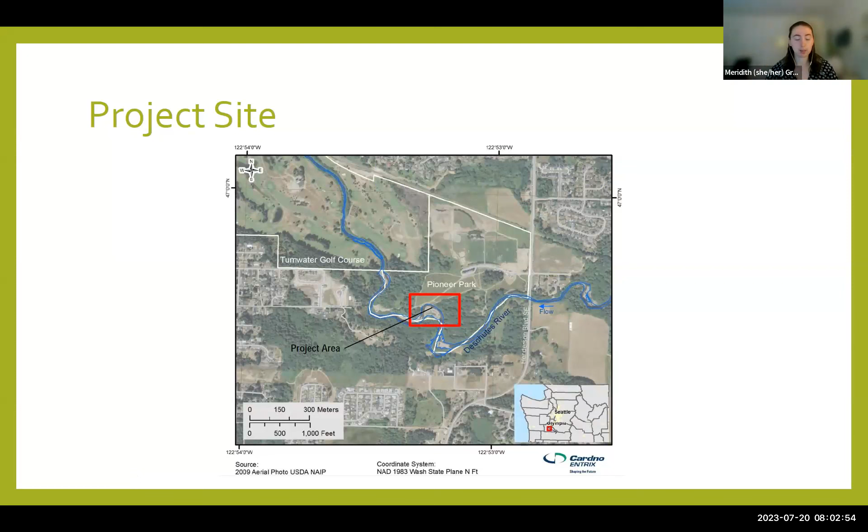A little bit of place setting: Pioneer Park. We're talking specifically about this one area on the southwestern side of Pioneer Park where it meets the river. This project site is really active. We have the Deschutes River running right by it, and it moves probably about 10 feet per year down there, which is awesome—it's what a river does naturally.

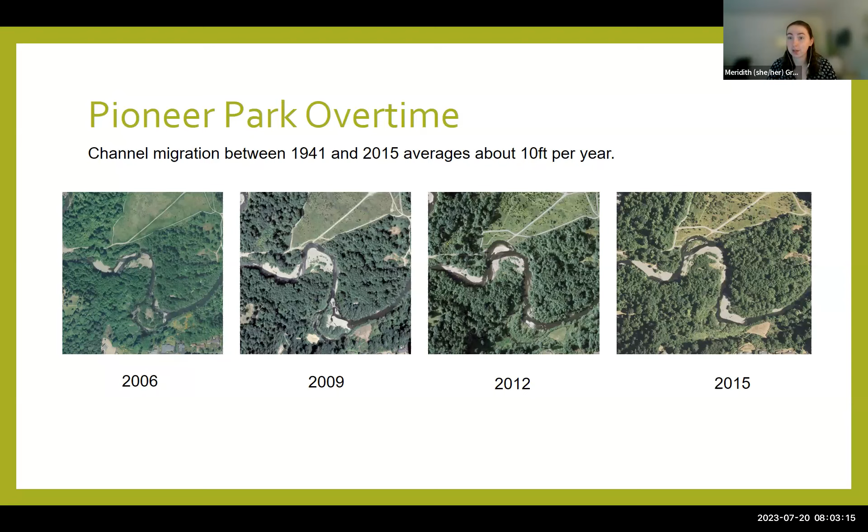However, when we're working in an area such as this, where we have a park to consider and a number of other impairments such as water quality, it can create a problem. We've seen a ton of movement even in the last 8 years since this project really started, trying to figure out solutions to help slow bank erosion and replant the riparian area. As you can see, there are trees on either side of this area where we have erosion, but the center area, which is being eaten away, doesn't have that cover.

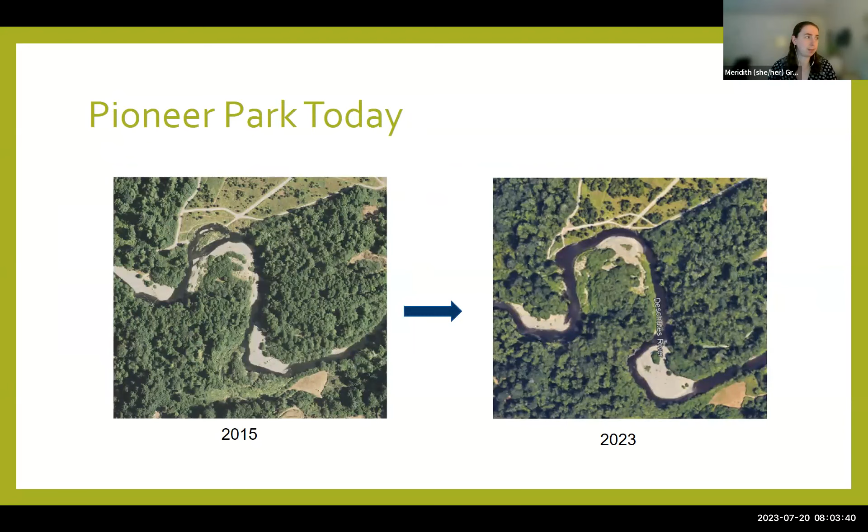So what options are there? Ultimately, the Deschutes River and Pioneer Park specifically is really at risk for high water temperatures and a lot of fine sediment—the Pioneer Park site is one of the top 10 sediment producers along the Deschutes River. In addition, there's insufficient wood. Normally a river would have a riparian area with a lot of trees; those trees would end up falling in and create great habitat for fish and other things. There are also often impaired riparian conditions tied to that lack of wood.

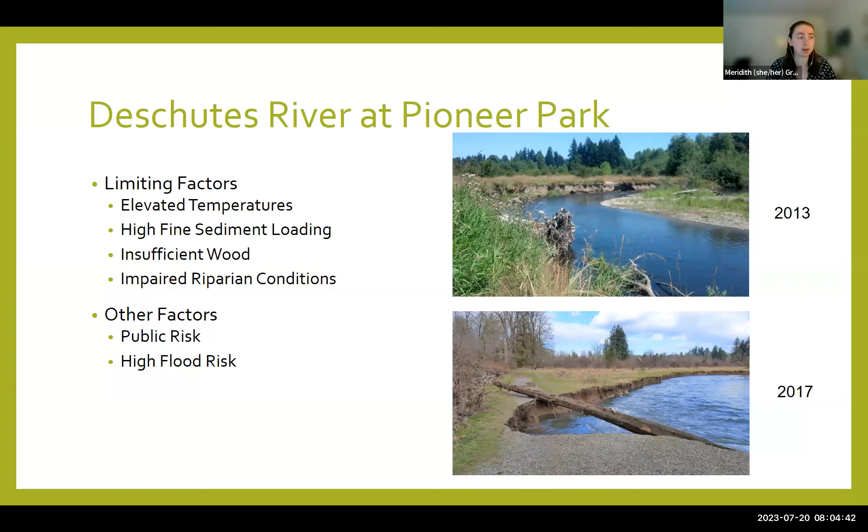When thinking about Pioneer Park in particular, we also have to remember that this park is heavily used by Tumwater residents and everyone around Thurston County, so we need to make sure we're taking public risk into consideration. As you can see in the bottom photo, the river doesn't really care about where trails are, so creating a safe option for folks down there is really important. In addition, the park floods pretty often, so what can we do to make sure solutions down here keep that in mind?

With all that in mind, we went to the Department of Ecology and asked for grant funding to do design, permitting, and construction work to figure out an alternative down there. Tumwater was awarded about $450,000, which was awesome news, and we were able to hire Stantec to complete the design and permitting. Ultimately, the project had 3 years within the grant funding time to finish the designs, permitting, and construction.

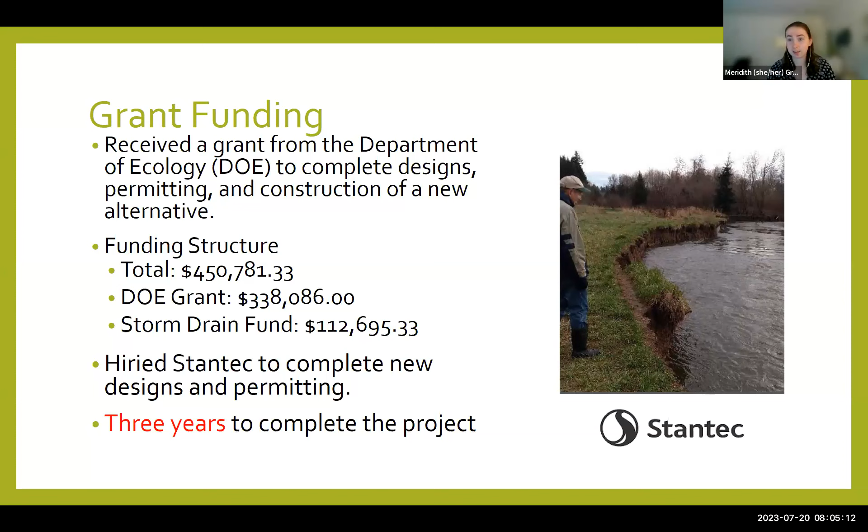We thought that was all great, that was going to work out nicely. Originally, we had planned for this schedule where our grant agreement would run from October 2021 until October of 2024.

We'd be able to do designs and all of that. In projects like this that are pretty complicated and working with an active water body like the Deschutes River, we always try to get feedback from permitting agencies first to make sure timelines are realistic. We bring stakeholders to the table as soon as possible. So last fall, myself and Grant Gilmore from the City of Tumwater met with representatives from the Department of Ecology and the U.S. Army Corps of Engineers to talk about the project.

And they threw a giant wrench in our whole plan. The U.S. Army Corps of Engineers let us know that any project doing in-water work, if we were putting anything in the Deschutes River, would require at least a 2-year permitting timeline review, which throws off our 3-year plan to get everything done.

So we thought, let's take a creative approach to this. Originally, if we focused on bank stabilization and riparian restoration, building about 5 feet back from where the bank is, we'd be able to put large woody debris structures in place without touching the water, knowing that the next winter when the rains got heavy and the river got big, it would erode back and meet the project where it was. This approach allowed us to avoid permitting through the Army Corps of Engineers and stay within that 3-year time limit.

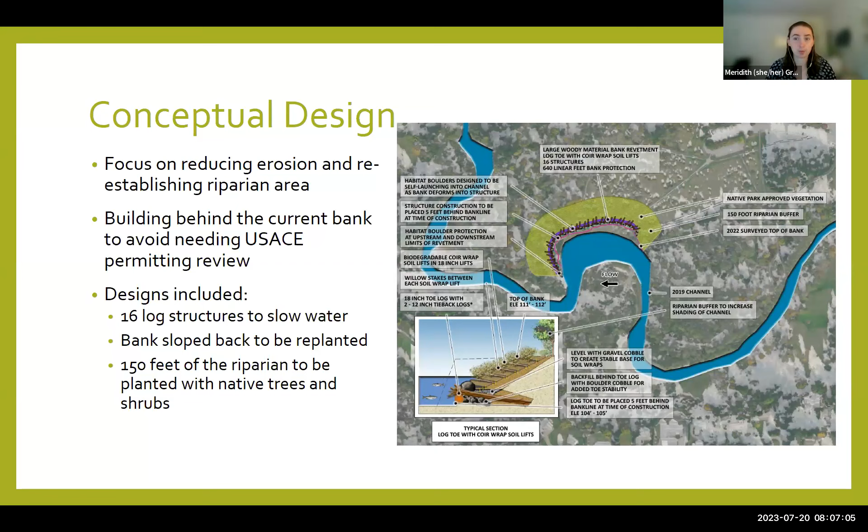Like I mentioned earlier, we really like to talk to stakeholders before we get too far along in the process. So we brought this to the stakeholder group for this project, including representatives from WRIA 13, the Squaxin Island Tribe, Thurston Conservation District, Washington Department of Fish and Wildlife, the Department of Ecology, Puget Sound Partnership, Olympia, and City of Tumwater's Parks Department, and Stantec, the project consultant. We brought this to them in January and February of this year, and ultimately we were returned with a not-approved consensus.

The group felt there wasn't enough in this approach to help restore normal river functions. Because we weren't doing any in-water work, we were relying more on bank stabilization efforts that didn't necessarily have as many co-benefits for things like salmon habitat. So we had to go back to the drawing board.

We knew what our goal was. We were trying to find a solution to meet the water quality and habitat goals that the City of Tumwater and the project stakeholders have, all while fitting within the Department of Ecology's requirements for the funding and timelines. So after a lot of negotiations between many different parties, we were able to come up with a new plan.

The new plan focuses on multi-benefit design solutions that increase river complexity, follow natural solutions that rivers normally have in areas like this, include habitat, and work with the river. The design on the right is an example of what this looks like. This came out of Skagit County and a park they had there.

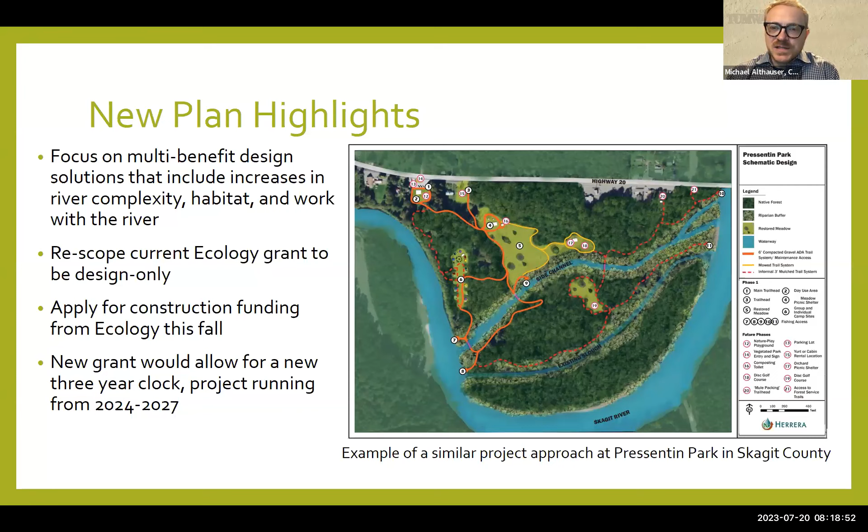Okay, that's helpful. What I wasn't really able to discern was whether we're compromising to meet the timeline and bureaucratic requirements for the Corps, or if we're actually expanding the scope of the project to be a better thing. It sort of sounds like the latter, because it's going to involve everything you just laid out, whether it's additional shoreline or that side channel we'll construct. So, to Eileen's point, every year we waste is a challenge, but it sort of seems like a happy matter of happenstance where we'll be able to save some funds and end up with a better project. Yes, yeah, I would agree.

I think overall it is a better approach to the project site. It took some heartache to get here and a lot of negotiations, but I think ultimately we are going to get a better product out of it. And at the end of the day, we're going the direction that we were ultimately trying to go with the original designs that we had with RCO, Recreation Conservation Office.

So yes, the in-water work, the expansion of this project, the delay - I'm not excited about that, because I've been seeing this project every year and I'm seeing the shoreline and the sediment happen. But at the end of the day, we're going the direction we need to go.

One final question. I think the legislature this year put in a ton of money for riparian and salmon restoration. If we do this timeline, are we still going to be able to potentially access those new funds? I think they put in like $50 million between RCO and the State Conservation Commission to develop programs to achieve things that seem pretty similar to this.

I know Meridith's following that and is working on applications through other projects. So we are looking at ways that we can take advantage of some of those funds and apply some of the projects that we have to that.

When this project first went through the Department of Ecology's Water Quality Combined Funding Program, I think we applied back in 2020. The project ranked 17th out of 120 projects across the state. I anticipate with a better approach, with actually having some conceptual designs coming forward, that we would rank really high as well.

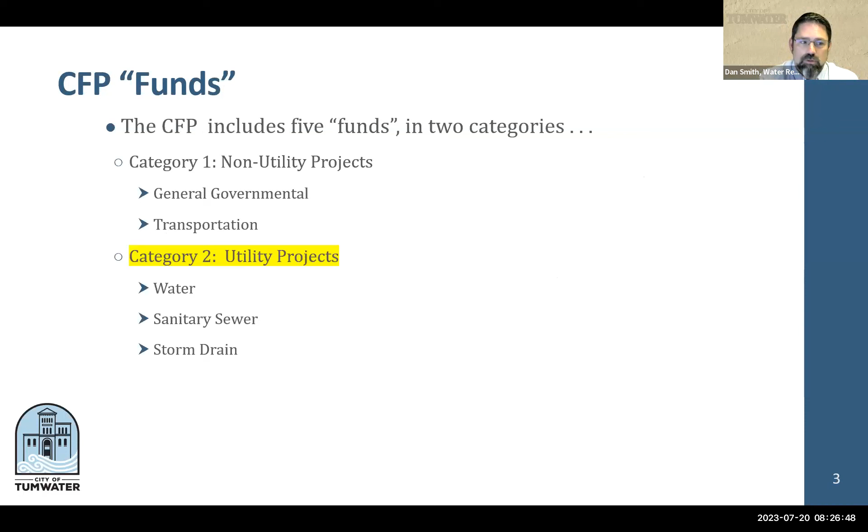As you know, projects get onto these lists in many different ways. You saw this slide from Brandon. We have a multitude of reports. We've done a number of basin assessments, and we continue to do basin assessments for stormwater. We have our water comprehensive plan and sewer comprehensive plan that really help inform where these projects are coming from.

We have anticipated growth that we know is happening in various areas. And so staff, from a professional judgment standpoint, recognizes where there are limitations or challenges operationally, as well as from a planning perspective. Those are how projects will ultimately get on this plan. They are reviewed by staff in the utilities, operations, as well as administration.

We have a total of 49 projects. On the last CFP cycle, we had 50 projects for consideration. So we've added a couple and completed a couple of those projects. To be fair, this is a fairly aggressive project schedule and is challenging. So we hope to get to as many as we can, but we are challenged and limited in some ways, which we'll talk about here.

Again, no general fund dollars to support these projects. For the most part, these are all utility funded projects, for a total of 123.2 million over the course of 6 years for the 6-year total.

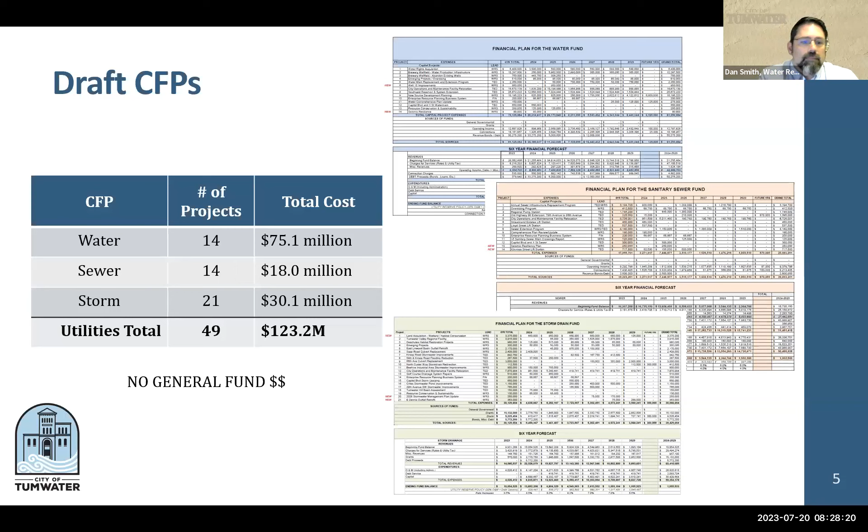On the drinking water side, we look at security, we look at water quality, we look at source development, mitigation for growth, where we do have some operational challenges, whether it's fire flow or appropriate infrastructure. Is the infrastructure sufficient quality? Is it today's standard, or is it an older drinking water main that we might need to replace?

So really the drinking water CFP is the one that supports the infrastructure and the programs that support the operation, and then ultimately the expansion of the city's drinking water utility, because the city does not decrease in size, it only increases in size. So we also have to be planning for that growth and for that next generation of water customers.

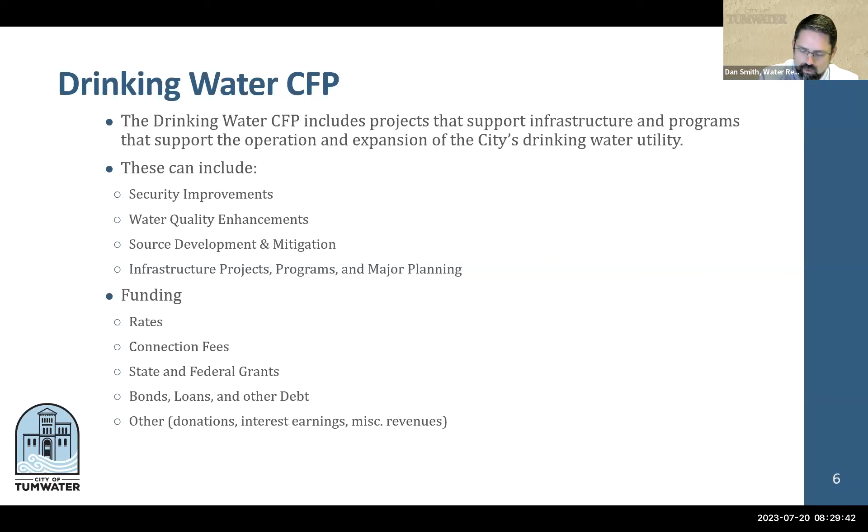Part of the limitations for the drinking water, for any of the utility CFPs, is that they're really enterprise funds. Meaning the revenues they generate through rates, connection fees, those are the only sources of funding we have for these projects. We can also look at grants, loans, bonds, and other types of debt. The other category, where we have donations, interest earnings, or miscellaneous revenues, is really the smallest percentage of revenues and doesn't contribute a whole lot to the CFP, but it is another area.

So I'm going to go into the funds now. Slow me down, ask questions if I'm going too fast, or if you have any particular questions on any one of the projects. Again, I'm going to focus on the new projects. Once I get through the new projects, I'll give you a high-level overview of the existing projects that are on there.

For drinking water, we have 14 projects, 2 of which are new. We've completed, or will be completing by the end of this year, the Israel Road and Linderson water main replacement and upsizing. You've just seen that one recently through Public Works Committee, and it has just gone to bid and been awarded, so that project is getting underway.

The other one we consider completed is the Trosper 6th and water main replacement and extension, which is tied to the extensive work happening at the Trosper and Capitol interchange. These projects will be completed by the end of this year, and we've removed them from the CFP, making room for the two new ones.

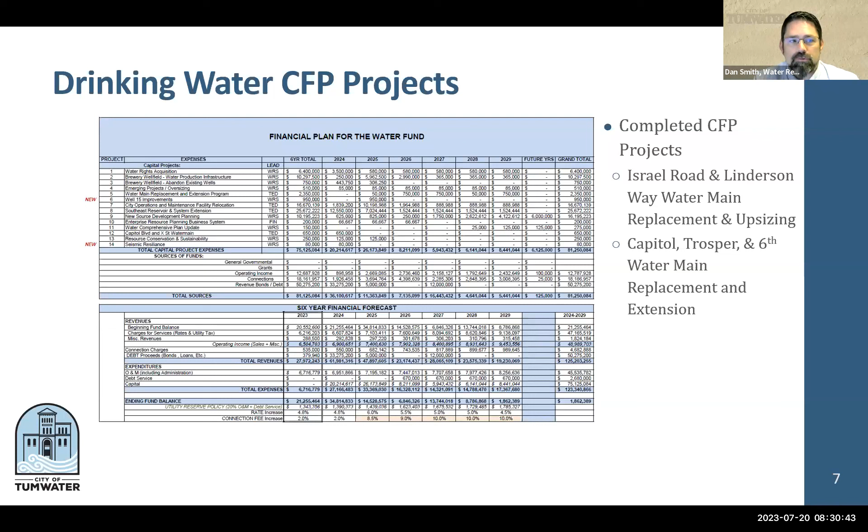The first new one we have is Well 15 improvements. This falls into the security category. In the last biennium, the council had approved a larger budget or rate increase, part of which included security improvements and other structural improvements at some of our well sites. We are considering those for Well 15, which is also our second largest producer in the city.

Well 15 is also our second largest producer in the city, and so we want to do some work to protect the well itself. We want to put additional security around it, and we want to add water quality protections.

Part of this is that the city is undergoing a corrosion control study right now, as part of our lead and copper program, looking at how optimized our system is. While we meet all regulations for that, the modeling is showing that we're not optimized, so there are improvements we can make.

One of those improvements is looking at adding corrosion control measures to Well 15, likely on-site aeration, similar to what we have at Bush and Palermo well fields, but much smaller in scale. The technology has improved so that kind of aeration can be done on a smaller scale. But there are other options such as chemical injection, and we're going to go through a study to look at what makes the most sense over at Well 15.

As we improve the physical site security and the building out there, we're also adding auxiliary power, which we don't currently have at Well 15, in case of an emergency. Again, it's our number two producer, so we want to make sure it's always at the ready. This has also been identified in our water system plan as one of the sources to help improve our redundancy and capacity during peak time.

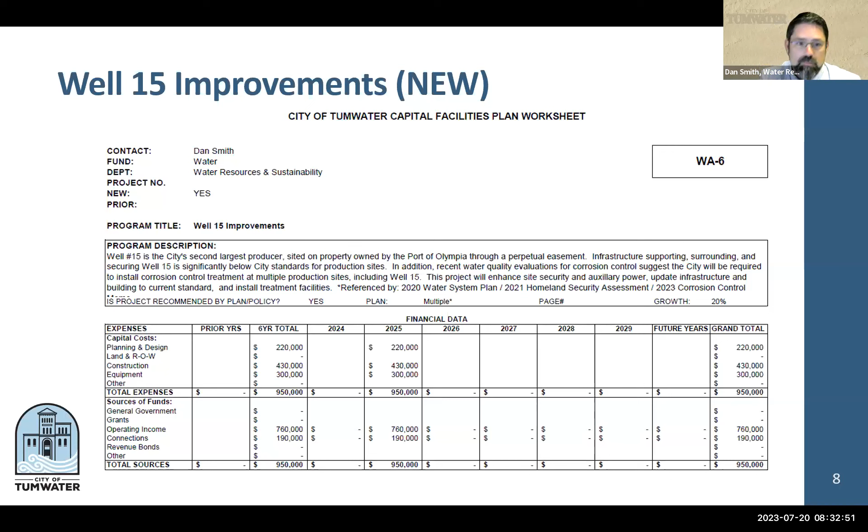The next project is more of a planning project, which will be done in conjunction with the sewer CFP as well. This is one that was recommended in both a homeland security evaluation we did, as well as our water system and sewer system planning process, as we're just kicking off our sewer planning process this year. We're recognizing that we have vulnerabilities from a large seismic event, looking at that Cascadia-level event.

We want to make sure we're starting to plan for what that looks like in a more concerted way between the two utilities. You might have heard Brandon or his team last time talking about improvements for the Linderson and Israel water main. There are facilities and fixtures we're looking at installing currently that help increase stability during these events. This plan would look at what technologies and materials we need to apply.

Where? What is the backbone of our system? Obviously we wouldn't be hardening our system to every single residence, but making sure critical facilities are protected, so we have an ability to respond to a major event like this, and go through all those planning processes for our drinking water and our wastewater utilities.

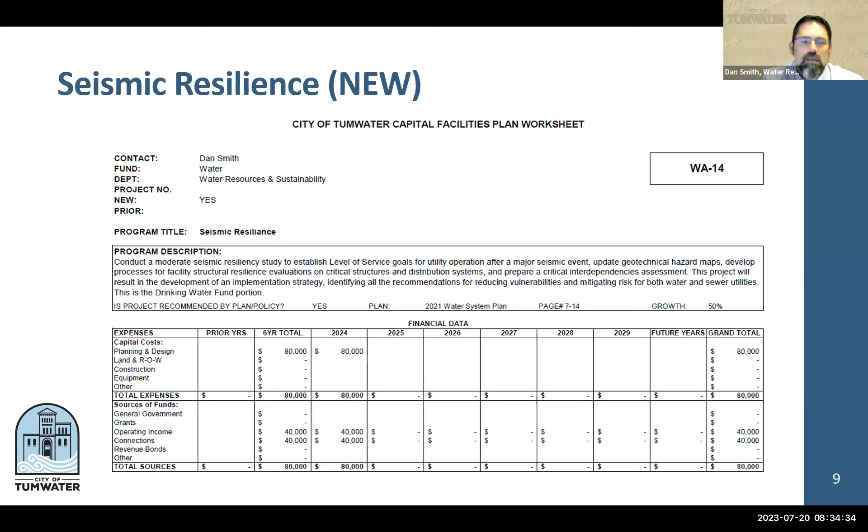So this is the city's drinking water portion of it, and we're looking to kick that off in the coming year, 2024. But it's likely to be a multi-year plan, so 24, 25, and I've split that up as you'll see, with the two utilities.

So the remaining 12 projects we have, you can see here, are really kind of around source development, growth, infrastructure maintenance, and programs and planning.

On the source development side, which is probably one of the biggest pushes we're going to have over the next few years, is really the Brewery well field, getting some progress done with that, getting the physical infrastructure built, so we can actually put those water rights we acquired a number of years ago to work.

We do have a consultant already hired for that, with the new Water Resources Program Manager, Patrick Soderberg. He will be leading that effort for us. We've restarted conversations with the consultant, so that one is in progress and will be coming to you shortly, probably by the first meeting in September, with the new amendment to that contract, because the first agreement was signed back in 2015 or so, and has been on hold as we've negotiated with our partners, Lacey and Olympia, on the ultimate disposition of the water rights there.

And then, of course, the Brewery well field, once we begin construction, we're going to want to decommission all of the 30 odd wells that are on the ground there in the golf course, and that'll be a major undertaking as well. But we're waiting to start that once we finish with the partners.

On the growth side, as I mentioned, this is kind of new source development planning. That's also in progress. Patrick Soderberg will be helping with that project as well. We do have a consultant we're talking with right now, and hope to bring forward an agreement to you shortly.

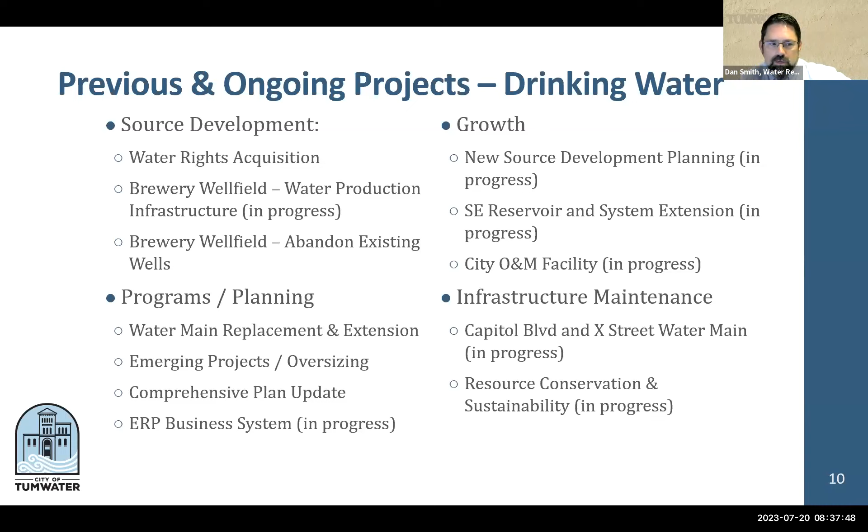And then, of course, on the programs and planning side, those are more the ongoing routine efforts we have: ERP, the Enterprise Resource Planning that Finance has been working on, the conversion to Munis. And then ultimately we have the comprehensive plan update, which will start a few years down the road.

Any questions on the drinking water before I move into sewer?

Okay, sanitary sewer is a similar issue. This is really about our wastewater. We are a conveyance only system - we don't treat. We send all of our wastewater down to LOTT, and LOTT takes care of the treatment for us.

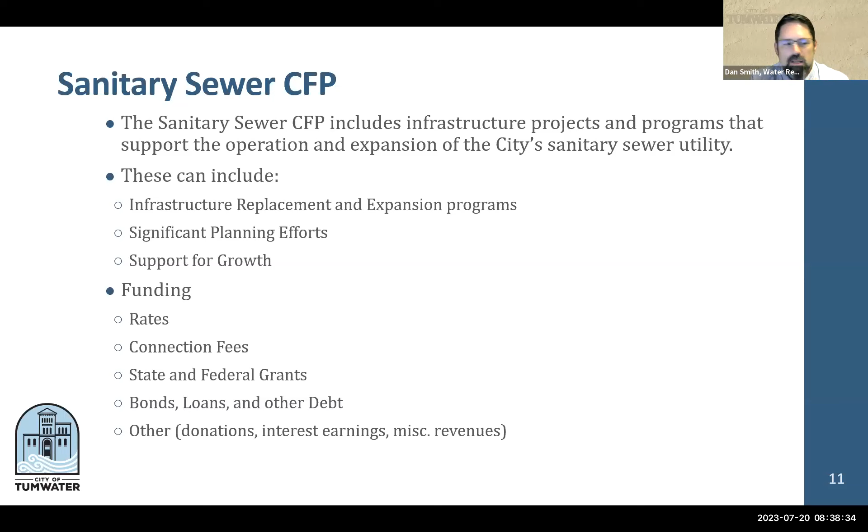So this is a more focused CFP that looks at infrastructure replacement and expansion, trying to address growth and where we need these facilities to be in place. Very similar to water, we have rates and connection fees that help fund it, backed up by grants, revenue bonds, loans, other debt, and miscellaneous revenues.

We have 14 projects here as well. Two have been completed - one related to all the work at Capitol and Trosper. As you can see, Capitol, Trosper, Linda Street sewer replacement, and resource conservation and sustainability. We've done some evaluation through our systems about where we can improve that.

We've looked at solarizing some of those systems and basically done what we can at that point. So this will fall off of here, but we'd be looking at efficiencies as they come up in the future. We just don't have something programmed in here on the sewer side.

Can I ask a question about that real quick before we move on? For solarization, in terms of doing what we can, is that more a challenge fiscally or technologically in terms of being able to generate enough power - I assume that's for the lift stations, right? Because those are the big electricity consumption units in the water system. So is that a reflection of needing a big solar array to actually power that, or is it more that this just isn't economically feasible for how much you'd have to do?

I would say it's more the array that would be needed in the location. A lot of these are also in treed areas, so they don't have that direct connection to solar that we would like. We've looked at a number of lift stations with our consultant working on the citywide analysis of our facilities and operations, and nothing really rose to the level of cost efficiency or cost effectiveness that would get us where we needed to be. So it was the array, and then it came down to cost too - you could probably do something, but would it be cost effective, and would it make sense for the power you'd need? Also taking into consideration that we purchase our power through the Green Power Program with PSE, so effectively it really wouldn't be adding much benefit to the city.

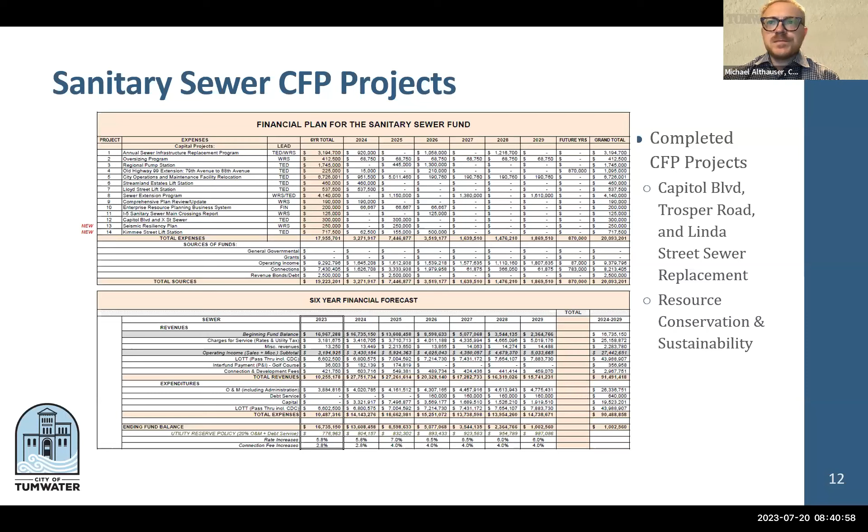Here is the sewer portion of the seismic resiliency plan. It's significantly bigger than the water side - we've done some work on the water side, which is why that's less at this point. The sewer portion will help us catch up on the sewer end of things, really taking a deep dive into the sewer. We're looking at probably overall a $300,000 plan, looking at not only infrastructure but also utility response needs and things along those lines. Again, a 2-year project.

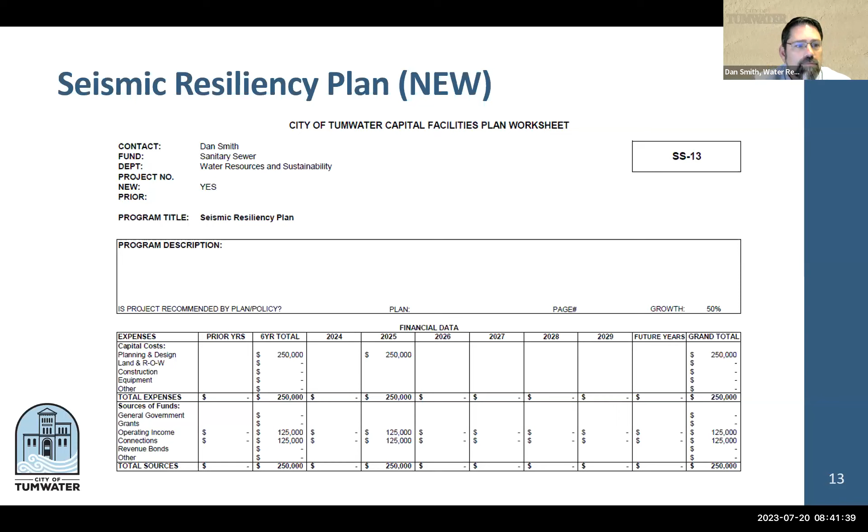This is the wastewater portion of that. And then the last new project is the Kimmie Street Lift Station. This was a deficiency identified through the 2015 sewer system plan. So looking at doing some early initial evaluations next year, getting design and permitting in '25, and ultimately construction into '26. This is a forecast at this point.

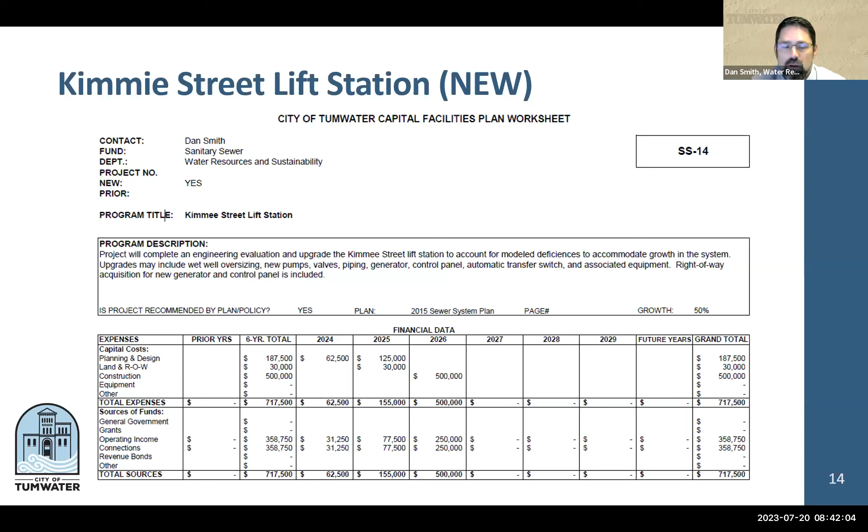We are kicking off our sewer system comp plan, one of the existing projects on that list, the comprehensive plan update. Last one was done in 2015, we're updating it this year, and it'll probably carry to next year. That will inform the priority for the Kimmie Street Lift Station and other projects that might have a later implementation date on that capital plan. So subject to change, but this is where we're at today.

We have the programs and planning for the larger pieces - the annual sewer infrastructure replacement. That's really just looking at our existing assets: what is the material and condition, and are there any programmed road improvements that we can coordinate those with?

We have an extension program that, hopefully over the next year, we'll be able to bring some proposals to council and committee for consideration as to what some of those pieces look like. Then we can start working on the actual construction, the easier pieces, to get that one done. It's been one we've been wanting to get on. With Patrick on board, we'll make headway in coordination with our transportation engineering department and finance and community development, who are also looking at ways to serve some of our existing neighborhoods.

Comp plans are in progress, the transition to Munis is in progress, the O&M facility is in progress. We always have a placeholder as a regional pump station. It's not identified, but there is funding to support it if there's an area for growth that is needed.

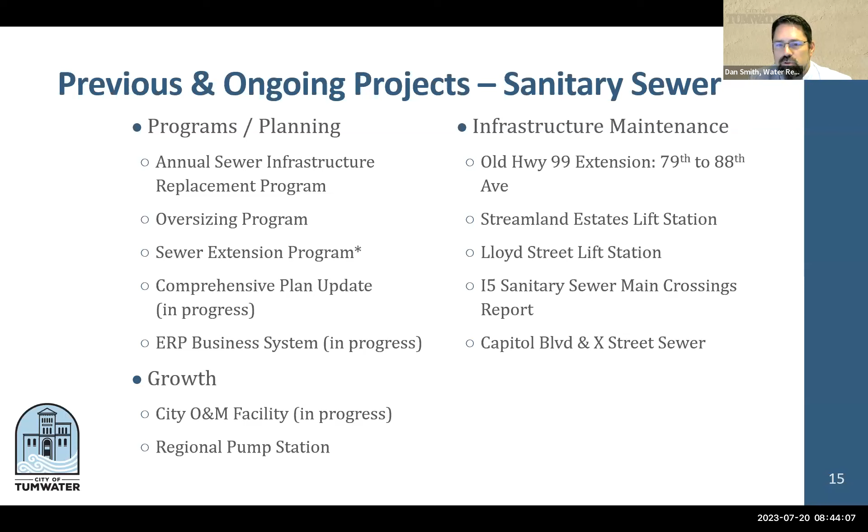We maintain almost a reserve for that work, which might be done in coordination with some kind of development we haven't seen yet come in. The remaining projects are Capitol Boulevard, X Street, Lloyd lift station, and Streamland Estates lift stations—program infrastructure improvements in the coming years.

Any questions on sewer before I move to storm? Okay.

Same spiel with the storm drain. These are real projects, but I have connection fees listed inaccurately here. There are no connection fees for our stormwater system—rates are primarily the source of funding, along with grants, which we are very heavily reliant upon for CFP projects relating to stormwater.

You just heard about Pioneer Park, and you'll be hearing about another one coming up as well. We're always trying to seek grant funding as needed, and we also have bonds, loans, and other types of debt we can look for.

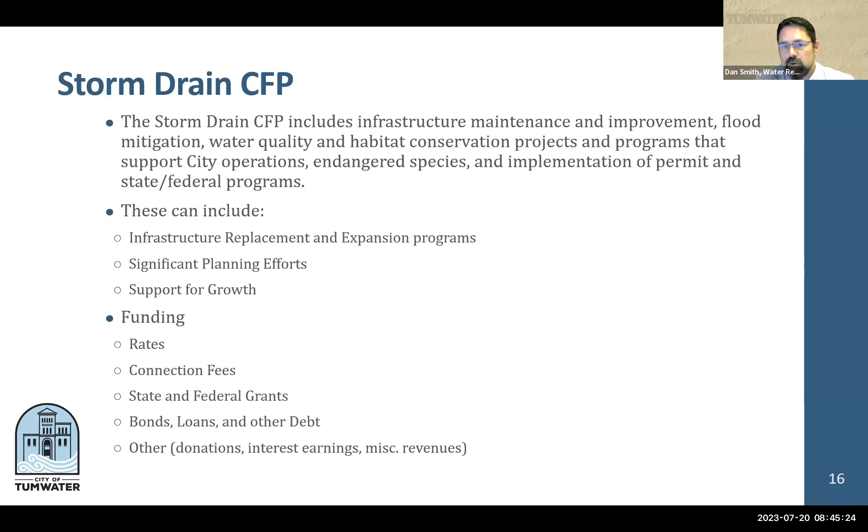These are really projects looking at how we collect and convey stormwater to reduce flooding within our city, as well as dealing with water quality needs—TMDL, total maximum daily load, and other regulatory expectations tied to the city's stormwater permit for water quality and habitat conservation. We also expand into dealing with endangered species and implementation of the permits we have. So we try to accomplish a lot with a little bit of funding.

We have a $30 million program outlined here, with 21 projects—a lot of projects, many added over the last decade with the annexations the city has completed. We've done basin analysis in those areas: what do we need there, and what do the surface water conditions look like?

So we have a lot more projects on the stormwater CFP, and I actually have a backlog of other projects not on this list at all that we'll continue to chip away at. As you can see, we have a $30 million total project cost over the 6 years, of which we're trying to make up almost 20 million in grants and other revenues like bonds and loans.

Two of the projects we've recently completed: the Lee Street bioretention retrofit, done in conjunction with the Capitol Trosper work, was integrated into that project.

Also the Deschutes River flood reduction and erosion study, which we'd like to bring back to committee at some point in the near future to give an overview of the ultimate outcome and the planning work done. The team from Stantec and Greer Environmental Consulting, including Meredith, did a great job pulling together a lot of information for the city.

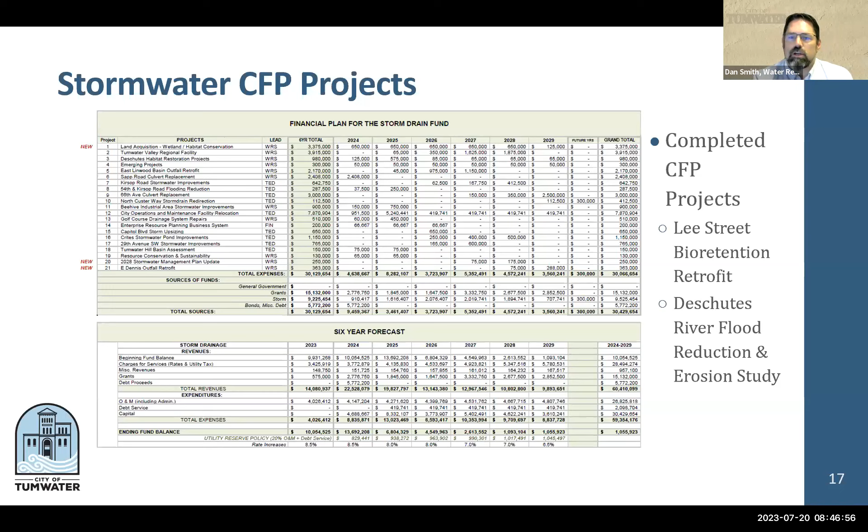So we can have a better understanding of what is needed down there. The first project I've called out as a new-ish project is land acquisition, wetland and habitat conservation. We've always had a land acquisition line here to help with mitigation for stormwater projects where wetlands might be impacted and we'd have to acquire new wetlands.

I've expanded this category to include the habitat conservation piece. There are a number of properties coming available, or that might become available, that we could look at along the Deschutes River area, as well as some Kirsop area wetlands for conservation purposes. So we've increased the scope for this project and included more funding—a significant expansion of funds looking at this aspect for the city.

For this piece, Dan, for habitat conservation, this is separate and apart from when we think of habitat conservation plan for the gopher specifically. Absolutely, this is different habitat conservation. This is wetlands, this is riparian area. This is outside of those endangered species issues. Got it, thanks.

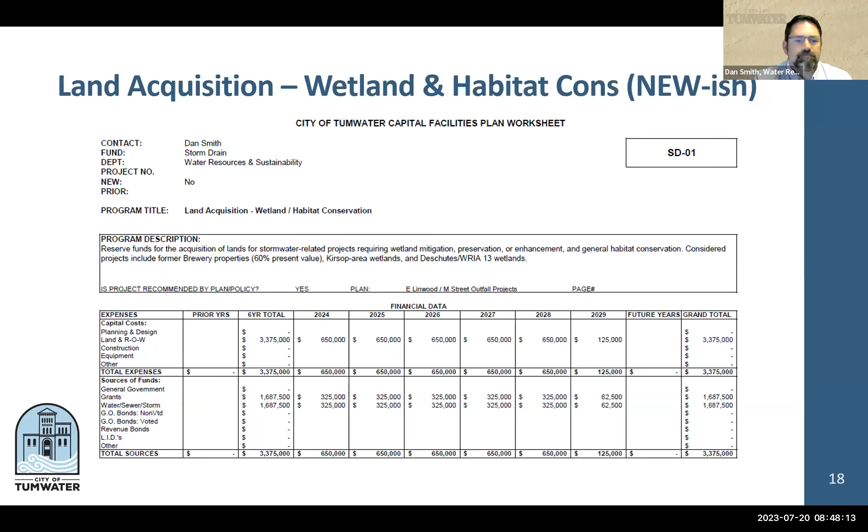The next one we've got is a 2028, the new one, and this is really just making sure that we have a reserve and we are looking forward. We completed our last stormwater manual or stormwater comprehensive plan. I need to update that. This is really our management plan, not the manual, the drainage manual. And this is really looking at our next major planning process for the utility.

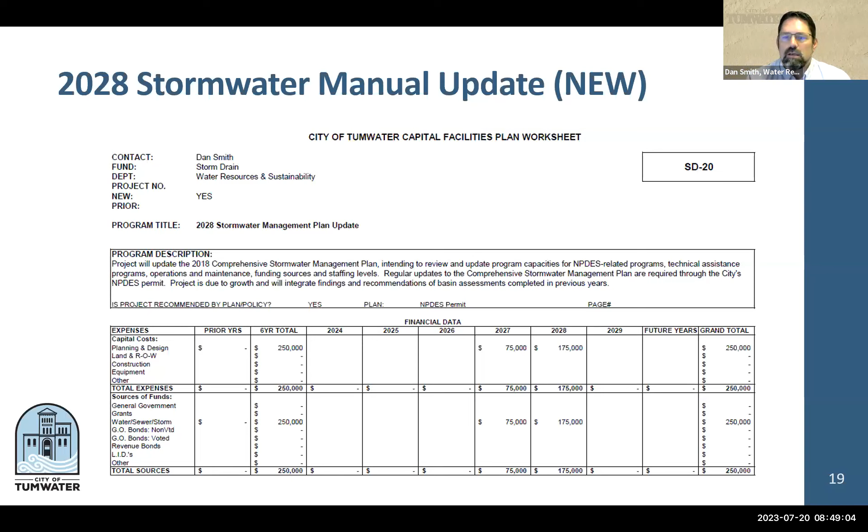We are doing lots of little basins. You might have heard Dave and Meredith talk about our SMAP, our stormwater management action planning process that we're going through, and those are very basin specific. This comprehensive plan really ties all those together, looks at the utility's funding capacity, very similar to the water and sewer plans we developed in the last comprehensive stormwater plan as well. So we're not looking at this one until 2027 to wrap it up in 2028. We'll be on a 10-year cycle, complementing the other two utilities as well.

The last new project we have for stormwater is the East Dennis outfall retrofit. We've identified off of East Dennis that there is an unmitigated, untreated outfall collecting a significant portion of runoff from this City Hall, Israel Road area that discharges out towards the Deschutes. So we'll be programming some analysis and some retrofit of that. There's some additional work we'll be doing in advance of this. This is why it's a little bit farther out, and also dealing with staff capacity with all of the projects we have in the hopper right now.

Can I ask a question about that one too? Sorry to just keep jumping.

No worries. So this one's pretty far out. That's mostly a reflection of staff capacity. Seems concerning that this is entirely untreated and being discharged into the river. So that's mostly a capacity issue, just because the list of projects already on our plan is ambitious. I totally recognize that. This one just strikes me as pretty concerning.

Yeah, and to be real, most of our outfalls are not treated. We've treated some of the more significant ones so far. We're working on the M Street outfall, working on the East Street outfall, or the East Linwood outfall. Those are still significant outfalls that to this day don't have treatment, but are in the process. We're trying to get grant funding. We have conceptual designs, or some level of designs. So there's a lot of work we're doing on these larger tributaries, these larger outfalls.

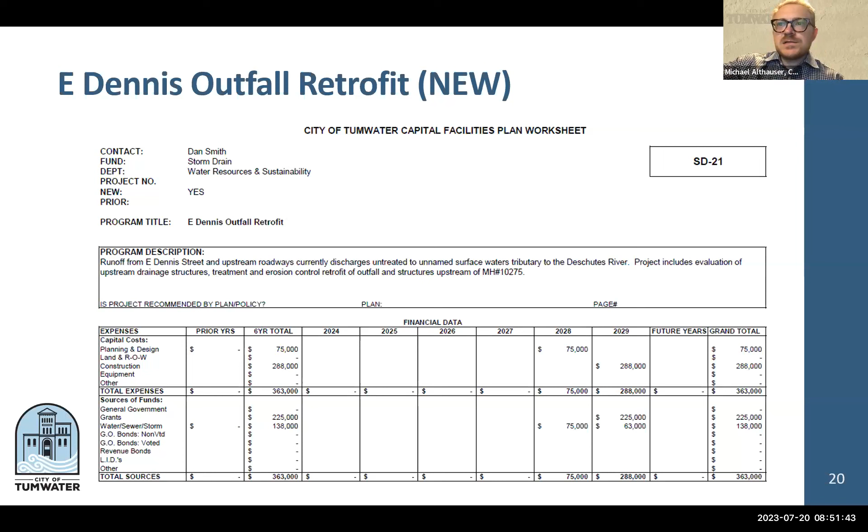So previous and ongoing, again, these are the remaining projects on that list. From a water quality, habitat, and fish improvement consideration, we'll be looking again at the Tumwater Valley Regional Facility, the M Street outfall, the Deschutes habitat restoration projects. Part of that is Pioneer Park. We have a number of other projects we're looking at—there's some erosion happening off of Tumwater Valley Drive. So those are all considered in there.

The East Linwood Basin outfall retrofit, another one I mentioned, looking at a larger watershed-wide funding source, floodplains by design. This is one of the projects Meredith is working towards, trying to encapsulate all of these projects together. We also have the Sapp Road culvert replacement, Percival Creek fish barrier removal project in progress, and a 66th Ave culvert replacement, similar work on the other side of town, that's scheduled in here.

Where we can work with sustainability and conservation through the tree board or other urban forestry issues connected through the stormwater utility, and there's some funding reserves for that. We also have the infrastructure maintenance side, and we have some challenges on the golf course.

I want to be clear there's a distinction, because Brandon had brought up some work that's in the general fund CFP. There's a portion of the drainage system through the golf course that discharges into the Deschutes River that is part of the city's public stormwater system. We've delineated those areas where it's the responsibility of the stormwater utility to maintain and provide those conveyances. That's what this would be addressing.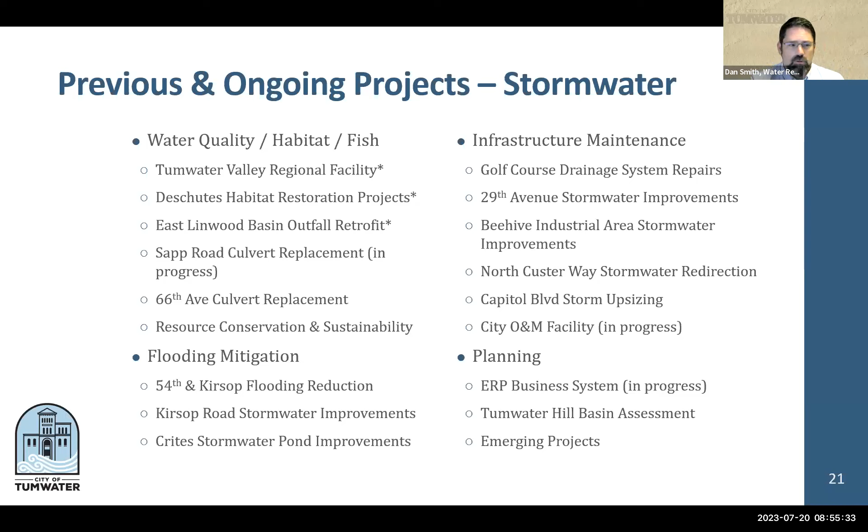And then the last one, which came out of one of the basin planning projects, is the Crites stormwater improvements. That's basically to help expand that size and increase infiltration. If you've ever driven around the Kreitz fill station on that bend after a stormwater event, there's a fairly significant flood that happens across the roadway there. So we're looking at addressing that.

So big projects, big plans, and big challenges. On each one of these plans on that summary page, I've identified who would be the lead entity—water resources or transportation engineering—for those projects that are more traditional in engineering. And we recognize we have challenges with resources in both staffing and staffing capacity and the funds to get us there.

We were able to balance all of these funds to keep us above the operating reserve requirements and maintain a healthy forecast moving into the 2029, 2030 timeframe, the end of this plan. But we've had to do that by looking at increases on the water, sewer, and stormwater utility rates, as well as increases for connection fees. And again, that gets us there financially.

It does not necessarily get us there from a staffing capacity standpoint. Consultants, while they can be a huge help—I can't tell you how helpful Meridith has been to our department, and while she was former city staff, as a consultant really taking a lot of these stormwater projects and helping us balance and manage those. But with consultants still comes a need for staff capacity, and staff need to manage those consultants.

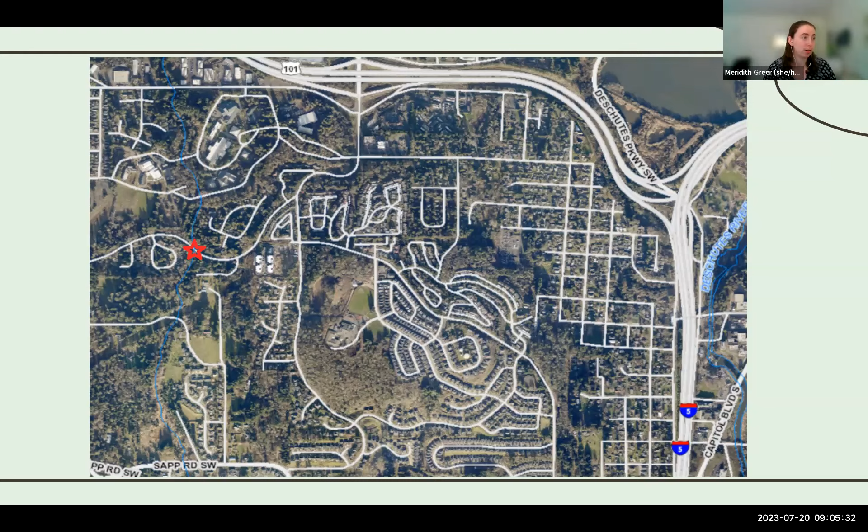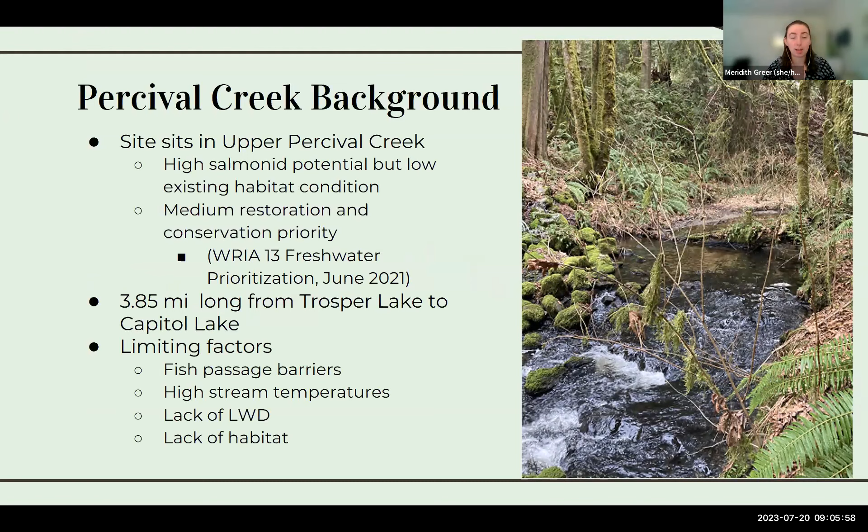A really quick overview to place-set this project: we're talking about the Somerset Hill area along Percival Creek, in the northwestern portion of Tumwater. Percival Creek as a whole is about 4 miles long, and we've been doing a lot of work on it. It's the location of the Sapp Road culvert project, about a half-mile upstream, as well as Sapp Road Park, about 12 acres the city of Tumwater has been restoring for quite some time. Ultimately, the limiting factors along this area are fish passage barriers, high stream temperatures, lack of large woody debris - trees falling into the river - and lack of habitat.

This site was first brought to the attention of the city back in the fall because someone was checking out the sewer main. There's a sewer main that runs back here, feeding the housing complex. The area where the culvert and the stream run goes straight into the bank, so we're seeing a ton of erosion along this slope, which was worrying from a sewer perspective - if some of the trees, especially the large ones, end up eroding and falling out, there's potential of breaking that sewer main. So this was put on Water Resources and Sustainability's radar from that perspective.

When we think about what we can do with culvert-related projects, there's a lot of funding right now for culvert improvement projects based on fish habitat. We've been through this with the Sapp Road culvert, and were successful in getting design and construction funding.

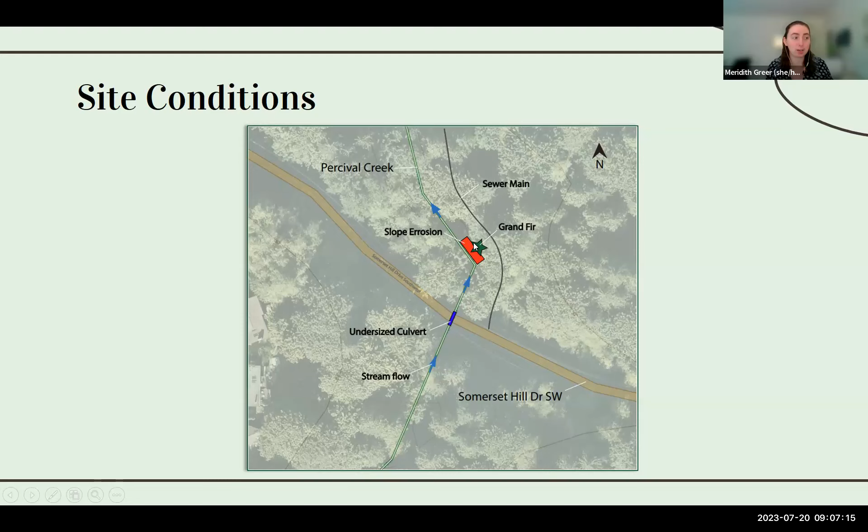So that was kind of the approach going forward, was seeing what we could do from a culvert perspective to really reduce erosion here by letting the stream do what it naturally wants to do. The stream shouldn't be taking this really hard turn. That's what's causing all this erosion. So what can we do from that perspective?

Currently they've got about a 5-foot culvert that's about 103 feet long. It's considered a partial barrier from a fish passage perspective due to velocity. When we're looking at how large a structure would need to be in order to let the stream move more naturally, and for us to be able to re-meander it away from that erosive site, we need at least 24 feet wide. That's quite the increase from the 5-foot culvert we have out there right now.

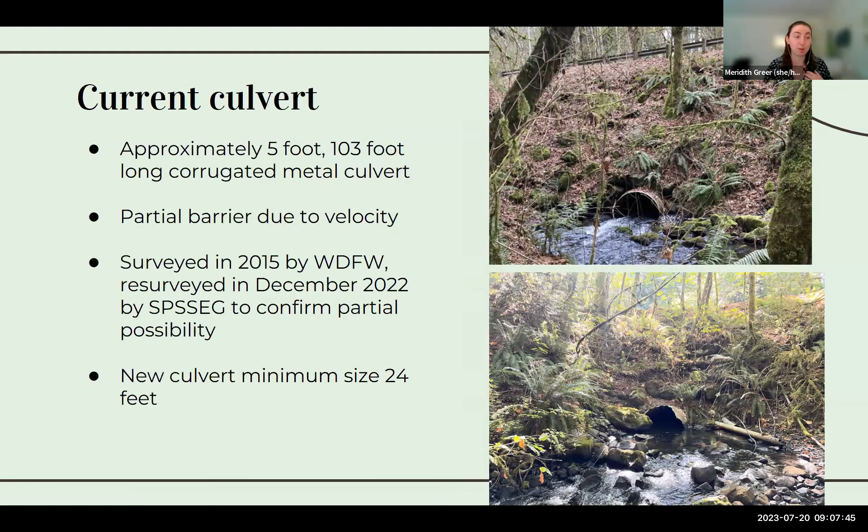The city of Tumwater has an on-call contract with Skillings Connolly. What we were really hoping to do over the last 6 months was take a look at different crossing alternatives to figure out what the best option for moving forward was.

The first option was a 3-sided box culvert that's about 24 feet wide. The pros of this is that it's 100% fish passable. However, one of the cons is the stream isn't able to move naturally. We kind of re-meander the stream in order for it to match up and downstream reaches, but the stream wouldn't be able to then go and move all over the place more naturally because it'd be confined to that 24-foot wide area. In addition, there's potential for running into issues of how wide the footings are. So one of the benefits of a 3-sided box culvert is that, as you can see in the photo here, you can have a natural creek run through the bottom of it.

When we were working through the Sapp Road project and did geotechnical work, which is trying to figure out what the soil looks like under the site, we found out that the soil, at least a half-mile up from here, was pretty non-conforming. So we would have to put really large footings in there in order to keep the culvert stable. We want to make sure that this is stable when it comes to having a roadway over it, and when it comes to earthquakes and things like that. Ultimately, it led to us having to put in a 4-sided box culvert on Sapp Road because if we were going to be putting in footings, they were going to be so wide that there was only going to be about a 6-inch opening that was natural. So that's something we might have to think about here and something we'll learn more about in geotechnical investigations.

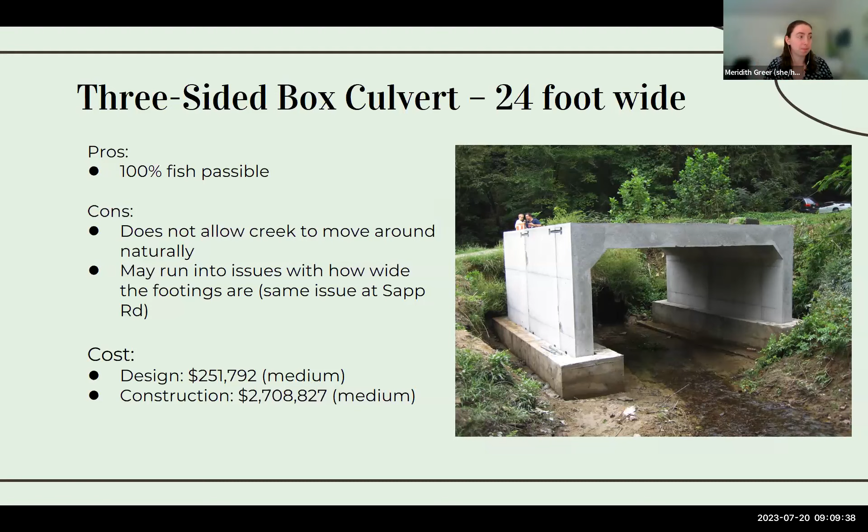The second option is a steel plate arch culvert, again 24 feet wide. Pros, it's 100% fish passable, which is what we're going for here. It's also the cheapest option. One of the cons is it again doesn't allow the stream to move naturally, and it doesn't have an option for the natural channel bottom. As you can see in the photo, we've got more of the corrugated metal along the bottom there. That's a little worse for fish passage. It also doesn't create as much habitat since you're having to deal with man-made structures within the stream channel. Ultimately, it was the lowest cost for design and construction.

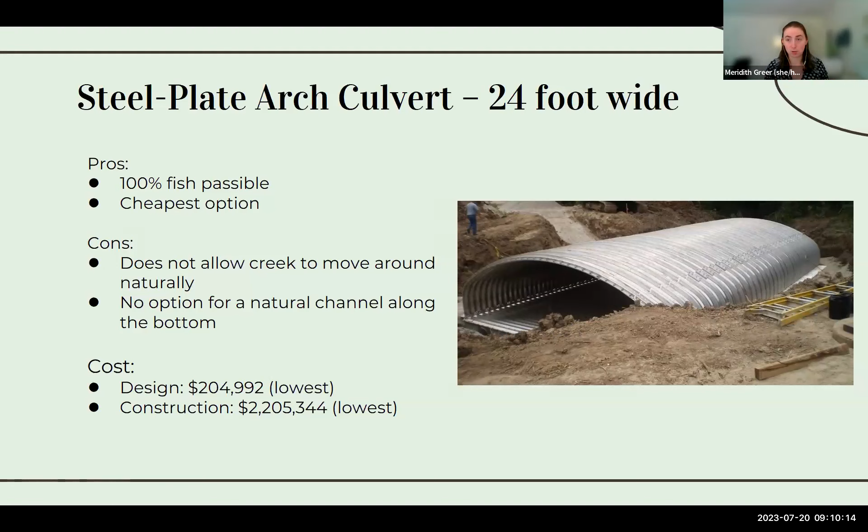The last option they looked at was a prefabricated bridge. These are bridges that can be made somewhere else and then brought to the site and dropped into place. The pros of this is it's 100% fish passable. Because it's so much larger than the other 2 options, it also allows the creek to move naturally within it. Additionally, it's the preferred alternative from project stakeholders. Dan had mentioned the WRIA 13 committee who'd been informing on the Pioneer Park project. They're also a similar stakeholder group for this project, and it's the option they are most favorable of. The cons is, like always, it's the most expensive option, both from a design and construction cost.

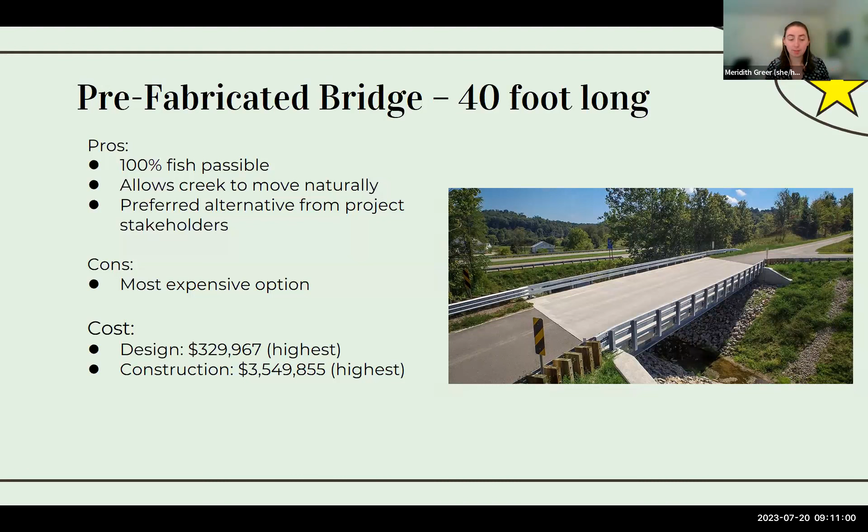As we were going through and figuring out what we wanted to design, we ended up taking forward to the Salmon Recovery Funding Board a planning-only grant to design a prefabricated bridge. This was going to be a 90% package. It was going to allow us to design the culvert replacement, the stream realignment, some habitat restoration, and that key bank stabilization effort in order to make sure that we're not going to lose those trees and ultimately that sewer line.

We had asked for about $280,000 for a project that required no match from the city. The Surfboard process is kind of a 6-month-long regional process. Ultimately, the project right now is ranked 4th out of 6 of those projects. Based on how much funding we're anticipating coming to the watershed, we don't think that it'll be funded this fall.

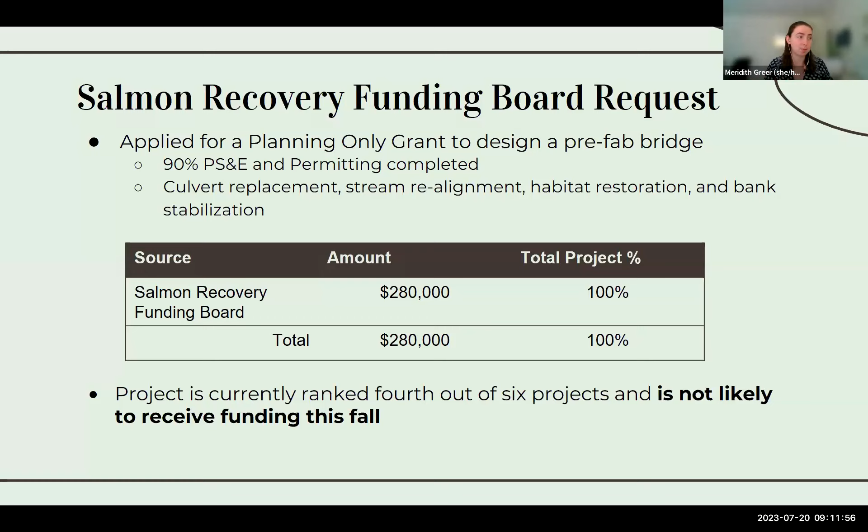Like Dan had mentioned, the stormwater CFP is pretty darn big at the moment, so this might be a little bit of a blessing in disguise of not having to take on another project at the moment. However, we are thinking about next steps.

What I'm hoping we can have at least a little bit of time for today is talking about kind of 2 approaches that we're looking for. Ultimately, while this project was identified last year and flagged as something that we were concerned about

So we have a little bit more time to work on the project than initially thought, which is great from kind of the funding perspective we're at right now. Ultimately, we're hoping to hear a little bit of feedback from Public Works Committee about if there is support for

continuing to move forward, looking for design funding for that prefabricated bridge option. Ultimately, it's the best option from a habitat perspective, even though it is a little bit more costly.

In addition, kind of the funding plan right now is to go back to the Surfboard next year. That process would start in January and seek funding again. The good news is we pretty much already have an entire application completed because we went through it this round.

There's also options to seek other funding, and probably something that we keep an eye on is what other sources might be out there. Ultimately, this would lead to a construction date of 2027 or later, depending on how long it takes us to get funding for design.